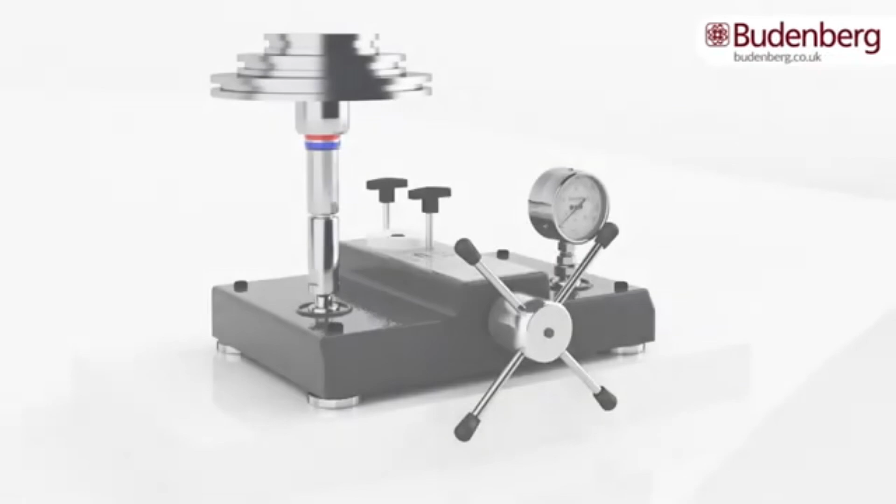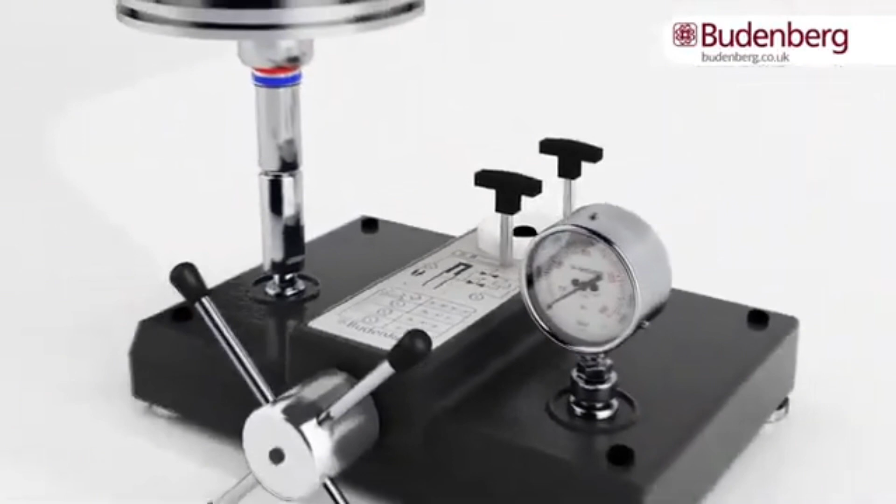Deadweight testers are mainly used to test the accuracy of a pressure gauge or pressure transducer. The calibration may require pressures as low as 0.01 bar with pneumatic deadweight testers to over 2,600 bars with hydraulic deadweight testers.

This video explains the key features, setup and operation of a Budenberg hydraulic deadweight tester and dual-range piston cylinder unit. The main components include mass set weights to match pressure required, valves to control the pressure, a reservoir to contain the liquid, a gauge to be tested, and a piston cylinder unit to achieve optimal accuracy and floating action.

A screw press generates pressure in the circuit, and leveling feet achieve a level piston cylinder. Within the casing of a deadweight tester is the hydraulic circuit that transfers the liquid.

First, fit the piston cylinder unit to the left-hand connection. Check the level of the tester with the spirit level on the top face of the piston cylinder unit. Adjust the 4 corner feet to level the piston cylinder unit.

Remove the filler plug from the reservoir and leave out while in use. Make sure that valve A and B are open and rotate the screw press wheel clockwise.

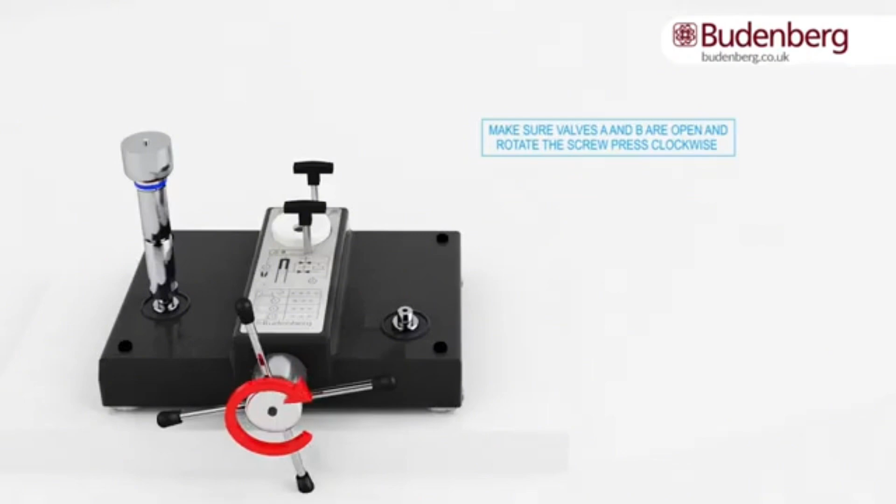Fill the reservoir with the appropriate mineral oil.

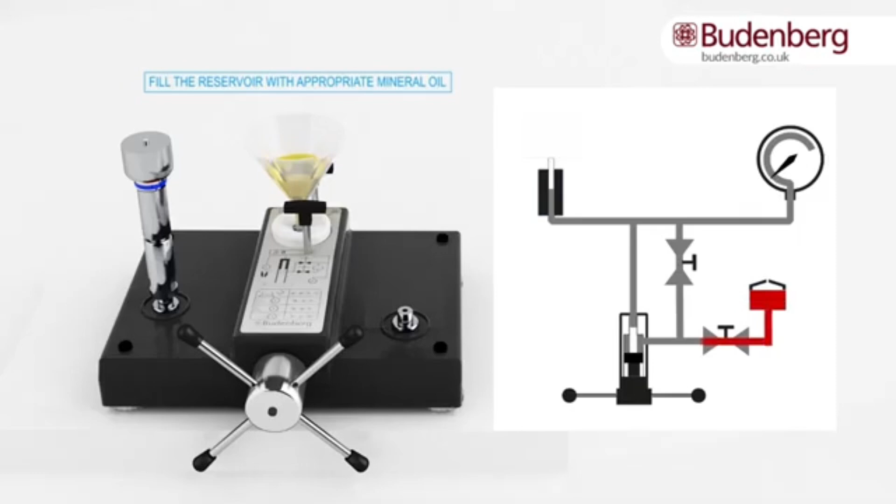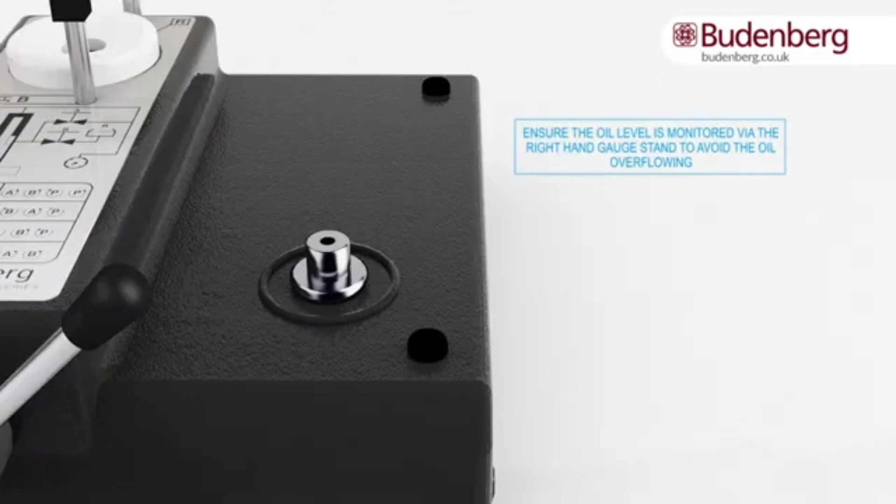Rotate the screw press fully anti-clockwise. This draws the oil into the system. Then slowly rotate the screw press clockwise to force any trapped air in the system out through the reservoir. Ensure that the oil level is monitored via the right-hand gauge stand to avoid the oil overflowing.

Fit the applicable gauge or instrument to be tested to the right-hand gauge stand. You first need to load the piston cylinder unit with the weights that equal the desired pressure to be tested for the pressure gauge.

For pressures of up to 140 bar or 2000 psi, valve B needs to be closed and valve A needs to be left open. The test gauge can now be calibrated by rotating the screw press clockwise. This will generate pressure up to approximately 140 bar or 2000 psi as the handle is wound in. When the handle becomes stiff to rotate, this will indicate that the pressure limit for this range has been reached.

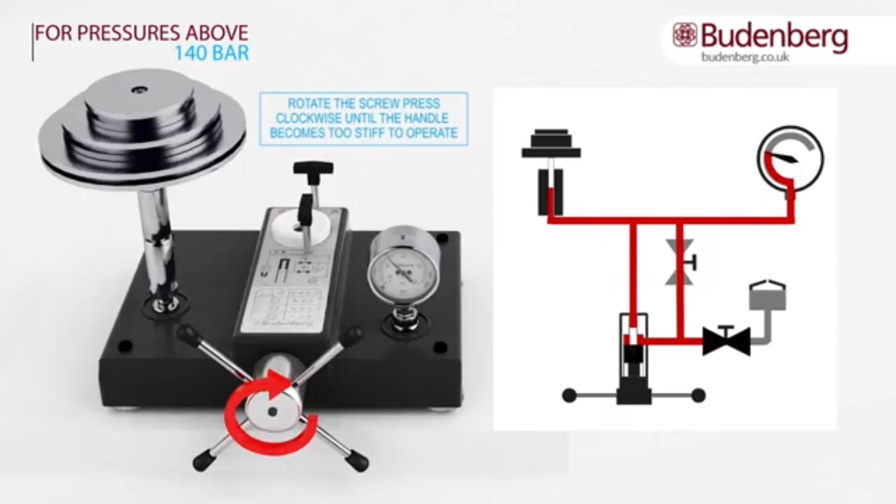For pressures above 140 bar or 2000 psi, the same procedure needs to be followed as for pressures below 140 bar or 2000 psi, where valve B needs to be closed and valve A needs to be open. Wind the screw press clockwise until the handle becomes too stiff to operate. At this point, valve A needs to be closed and valve B needs to be opened.

Continue to turn the screw press clockwise until the desired pressure is reached. When the approximate pressure is obtained during calibration, the weight should be rotated clockwise by hand.

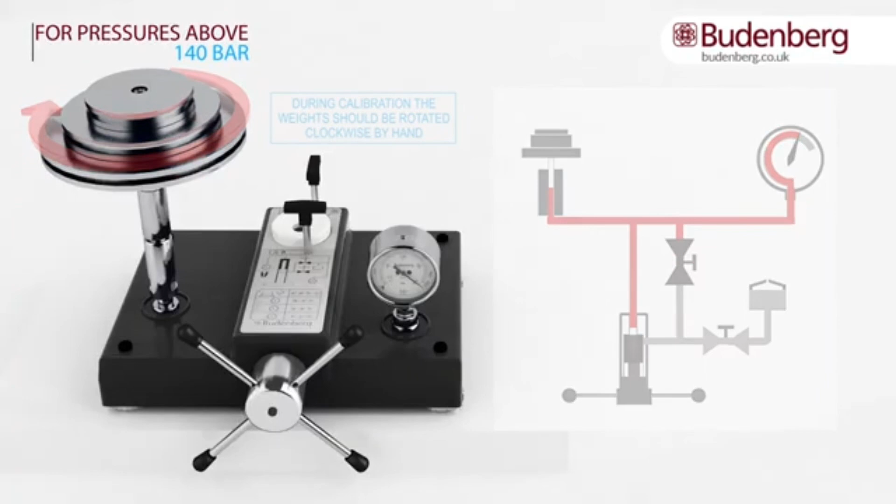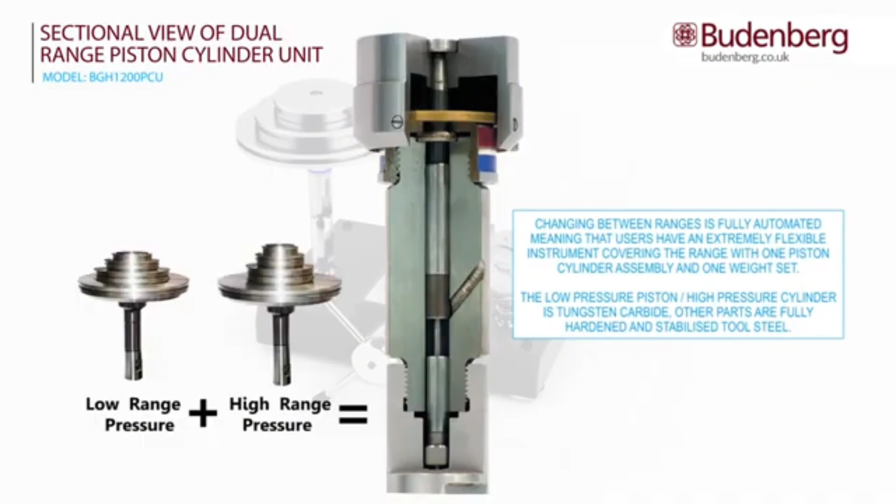The main benefit of a dual-range piston cylinder unit is that rather than using one unit and weights for testing low pressure and a separate unit and weights to test high pressure, you can now use just one piston unit for calibration of both high and low pressure, saving you both time and money.

The key components of a dual-range piston cylinder unit are: piston head, auxiliary weight, high pressure band, low pressure band, auxiliary piston, vent, high pressure piston, and low pressure piston.

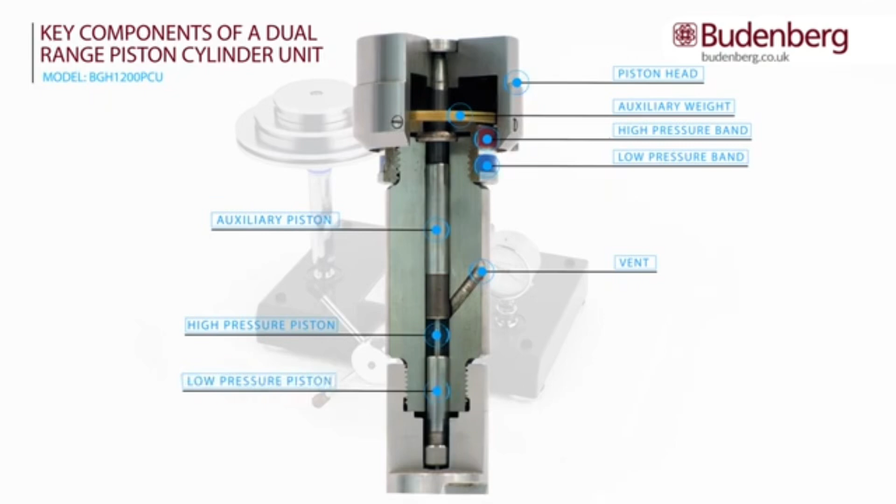The piston head, which carries the calibration weights, is operated by two pistons: a low pressure piston shown as blue, and a high pressure piston shown as red.

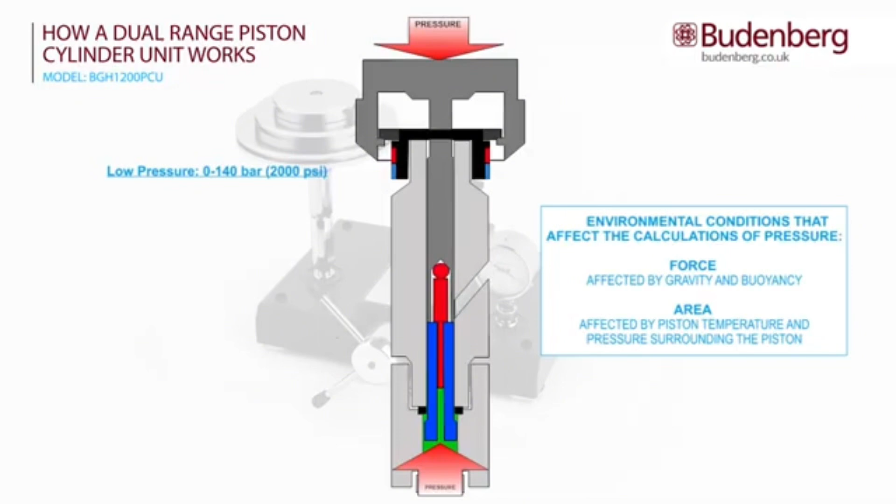As the supply pressure is increased, the low pressure piston is operated until the flange on the end of the low pressure piston abuts the end of the low pressure cylinder. This is now in equilibrium between the force pushing down from the mass set weights and the supply pressure from below. The pressure is now defined as pressure equals force over area, where the area is the cross-sectional area of the low pressure piston and the high pressure piston.

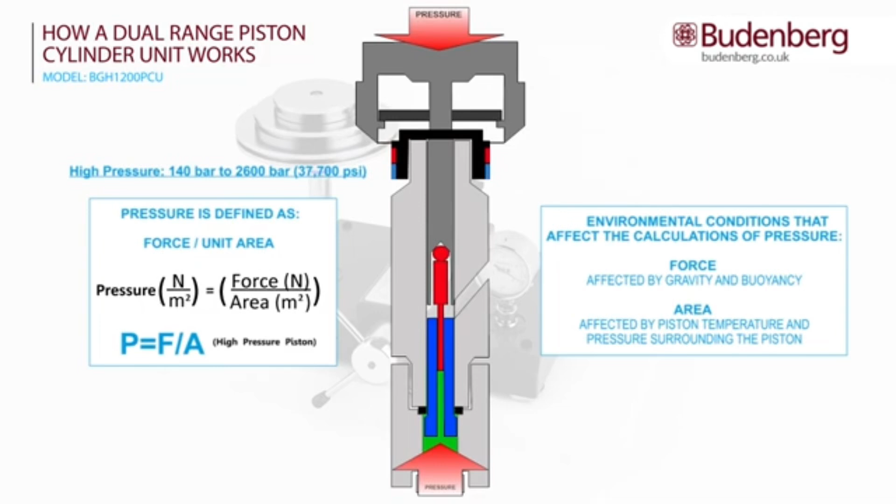As the pressure continues to increase, the high pressure piston operates through the middle of the low pressure piston, which is now acting as the high pressure cylinder. Indication of the range in which the piston is operating, and that the piston head is floating, is given by the position of the piston head. This can be seen against the two color bands on the cylinder. At this point, the high pressure equilibrium is reached.

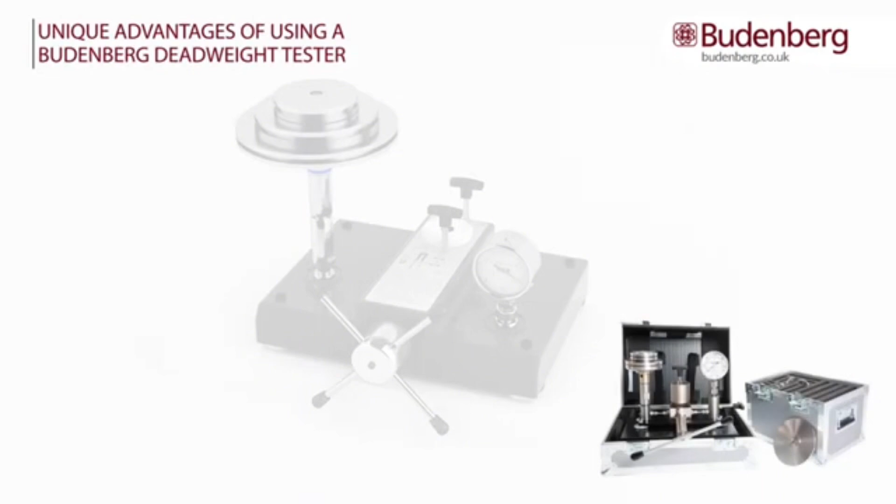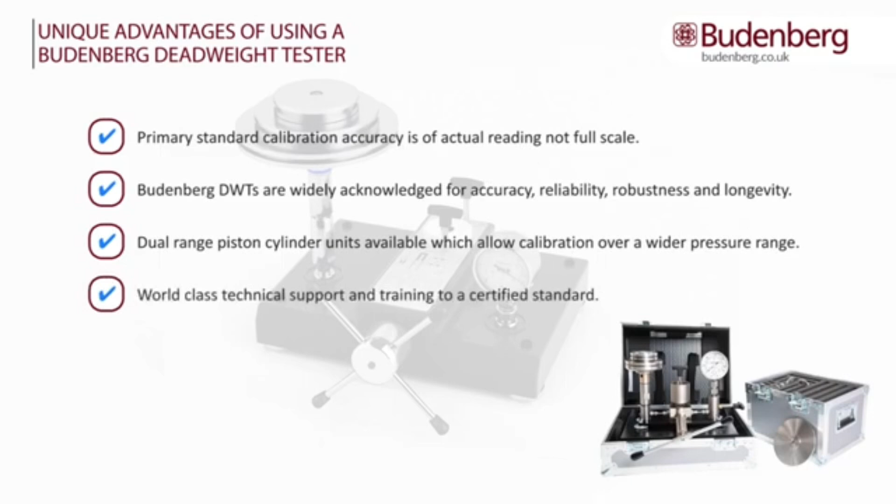Unique advantages of using a Budenberg deadweight tester: primary standard calibration accuracy is of actual reading, not full scale. Budenberg deadweight testers are widely acknowledged for accuracy, reliability, robustness, and longevity. Dual-range piston cylinder units are available, which allow calibration over a wider pressure range. World-class technical support and training to a certified standard. A wide range of deadweight tester accessories are available, both cost-effective and time-saving.